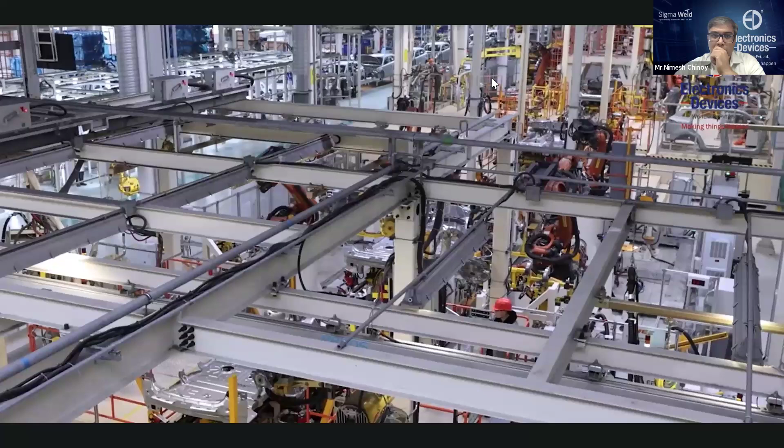Today, the Indian automobile industry is third largest in the world. But there was a time when conventional heating solutions and heavy reliance on imports created roadblocks for it. Our induction heating solutions paved the way for it to be in the fifth gear and keep pace with the ever increasing demand. From Bajaj Chetak to Royal Enfield Bullet, from Maruti to Mahindra and Mercedes.

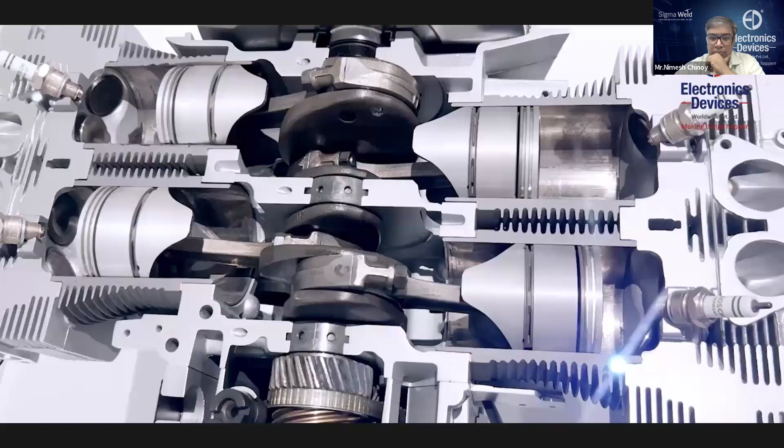Our indigenously built induction heating solutions have played an important role in empowering Indian and global automobile industry to cater to Indian and international markets.

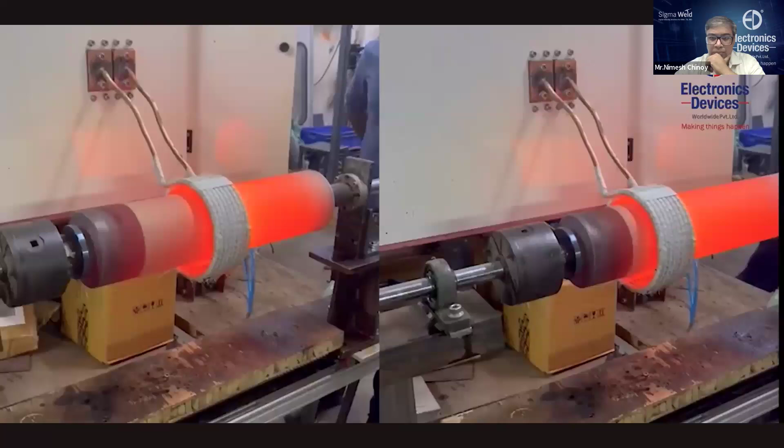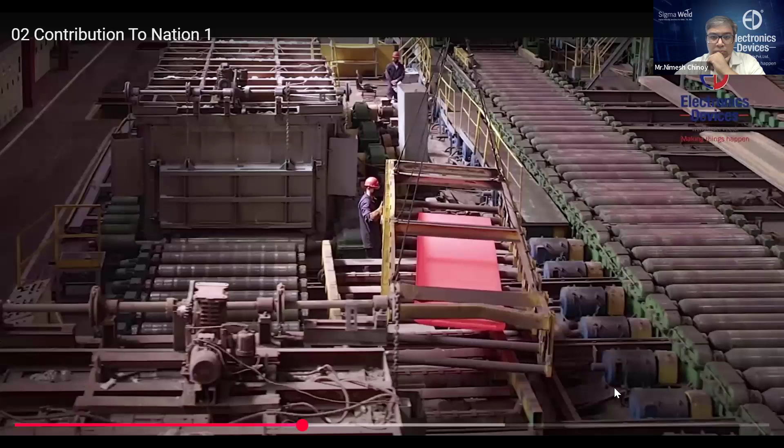There was a time when India did not have technology or forex capital. Many industries had to rely either on conventional production methods or had to pay heavy import duties, which was not feasible. And at the same time, consumerism was on the rise. Consumers demanded quality products. Spillage, tampering was no more accepted.

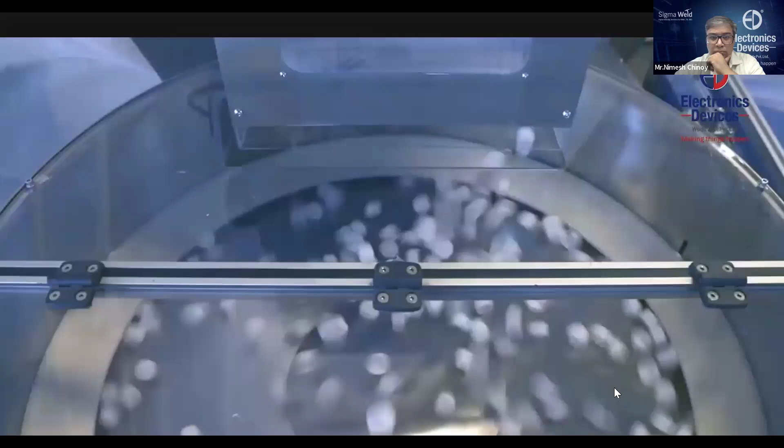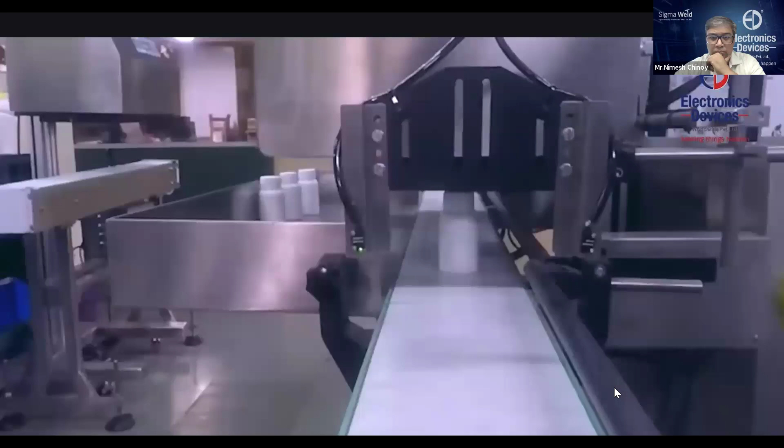Our first of its kind hermetically sealed solutions help deliver customer expectations. Plastic packaged bottles and containers could be sealed, leaving no room for leakage, counterfeiting, or product recalls. Today, FMCG, dairy, pharma, and food companies are serving fresh Indian spices, beverages, personal care, medical products to Indians and global citizens.

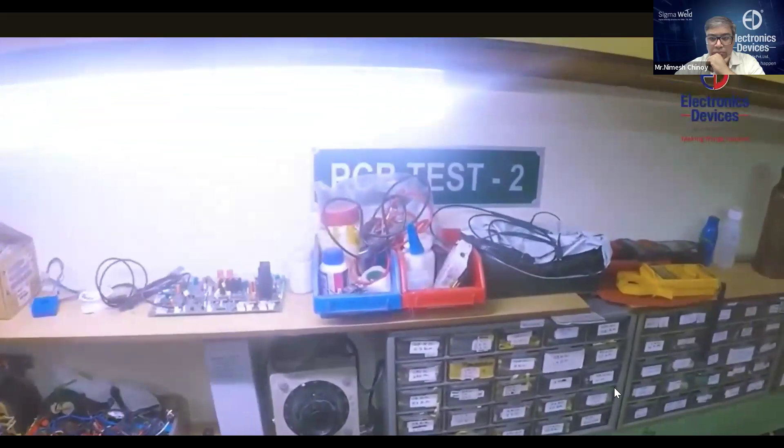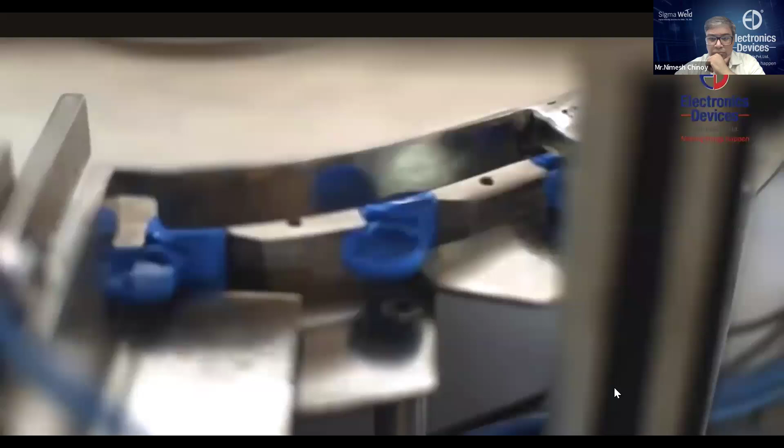The Indian pharmaceutical industry was facing a compliance challenge. Its medical science was ready for the US market, but it had to be US FDA compliant. Our made in India and first ever lab scaler machine helped Indian pharmaceutical companies with testing their products that made them US FDA compliant. From an import dependent country, we transitioned to an exporting nation even in the pharma segment.

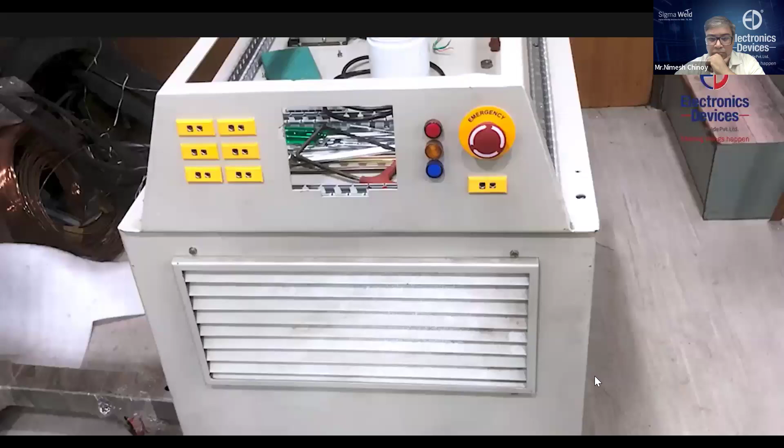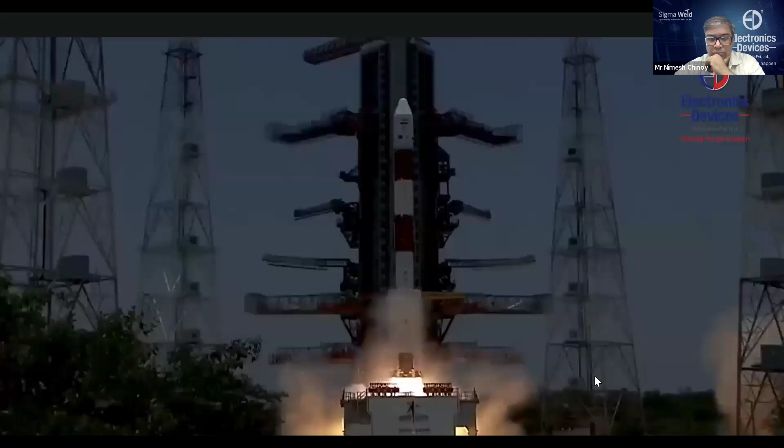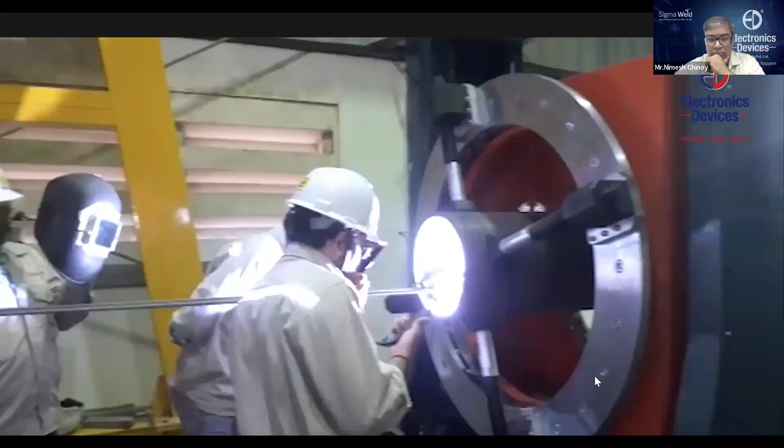Defense, aerospace, and nuclear are sensitive sectors crucial to strengthen India's global power. The country cannot be dependent on technology transfers and imports. The high-powered annealing machine built by us and used by Bharat Forge laid a solid ground for India's defense in the form of the Agni missile.

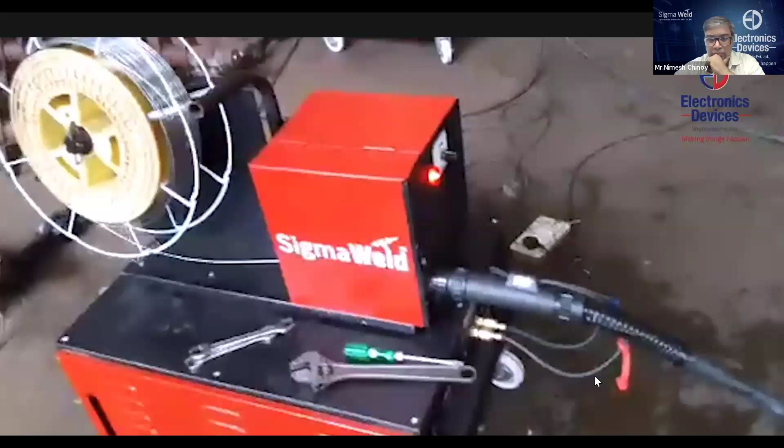Several of our indigenously built induction heating and welding solutions are used for battle tanks, submarines, foot over bridges, to manufacturing bullets and bombshells, in Mangalyaan and Chandrayaan.

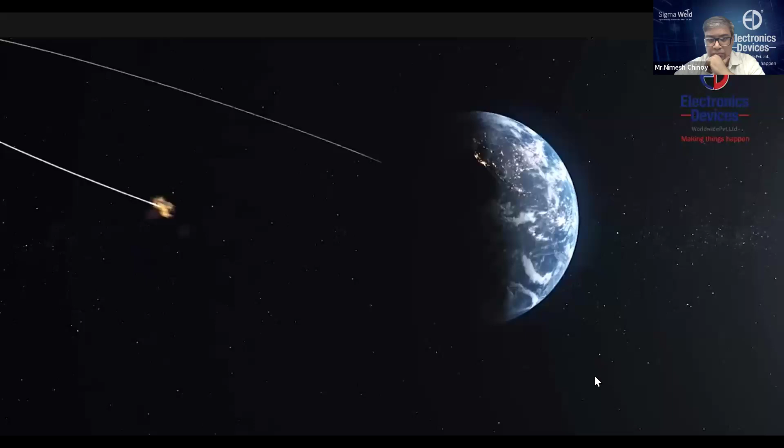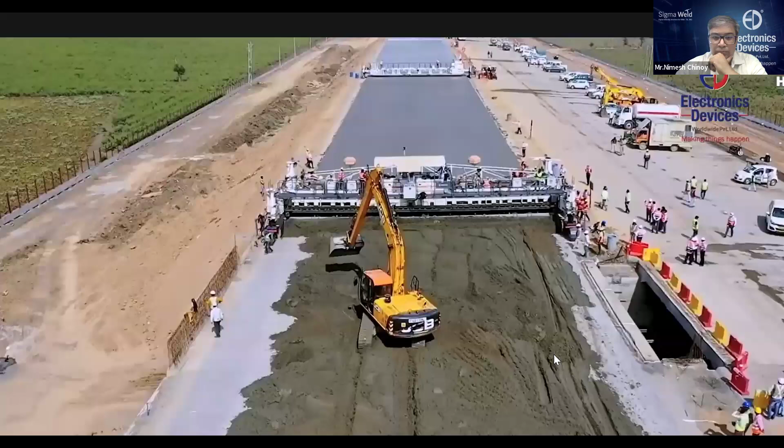Each and every made in India engineering solution has answered the call of industries. These solutions have saved billions in foreign exchange and energy consumption while enhancing productivity and reducing cycle times. These solutions have even inspired and encouraged 30,000 brands across 80 countries to choose us and to choose India for sourcing their engineering solutions.

That is what we are celebrating today. The ingenuity of India and Electronics Devices Worldwide Private Limited.

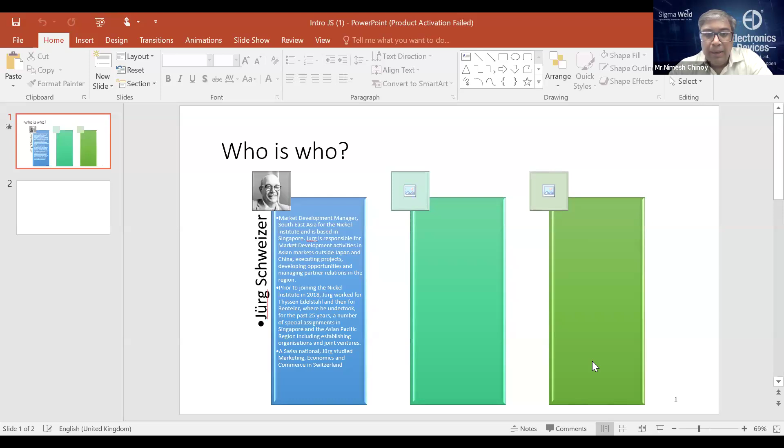Prior to joining the Nickel Institute in 2018, Jürg worked for Thyssen Edelstahl, and then for Benteler, where he undertook for the past 25 years a number of special assignments in Singapore and the Asia Pacific region, including establishing organizations and joint ventures. A Swiss national, Jürg studied marketing, economics, and commerce in Switzerland. And now I request him to take over so that he can introduce our guest.

Okido, I try to share my screen, send request. Okay. Yep, I have it. I need to get the right screen. Okay. Oh, you should be able to see it now.

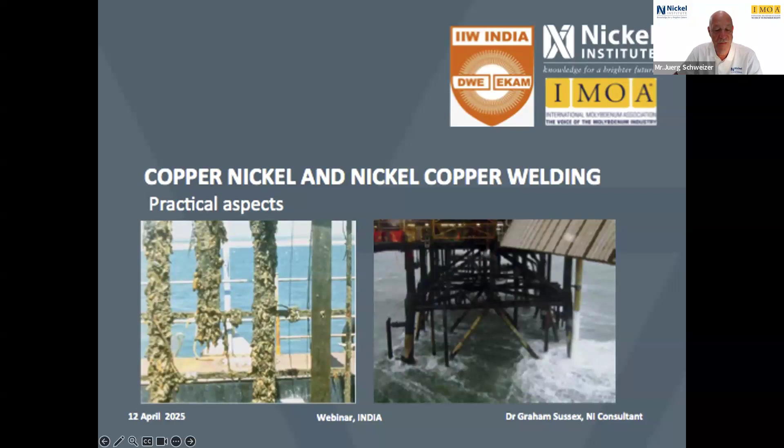And quickly, an introduction on the key sponsors of this. We have the Nickel Institute, and we are a global association of leading nickel producers. We promote the proper use of nickel in various applications, and we support markets for new and existing nickel uses, including stainless steel, while advocating for sound science, risk management, and socio-economic benefits in public policy. As you all know, nickel still plays a vital role in over 75% of stainless steel.

So our headquarters is located in Toronto. We have a research lab in Durham, the US, called NiPERA. Then we have our Brussels office. They are especially on public policies, sustainability, communication, and market development. And then two subsidiaries, one located in Brisbane and one in Singapore. So there are as well two non-profit organization offices in China and Japan.

Then the International Molybdenum Association, in short IMOA, is a global non-profit trade organization representing most of the molybdenum industry. They promote the properties and sustainable benefits of molybdenum as a key alloying element of stainless steels and nickel-based alloys, especially enhancing corrosion resistance in various modern applications.

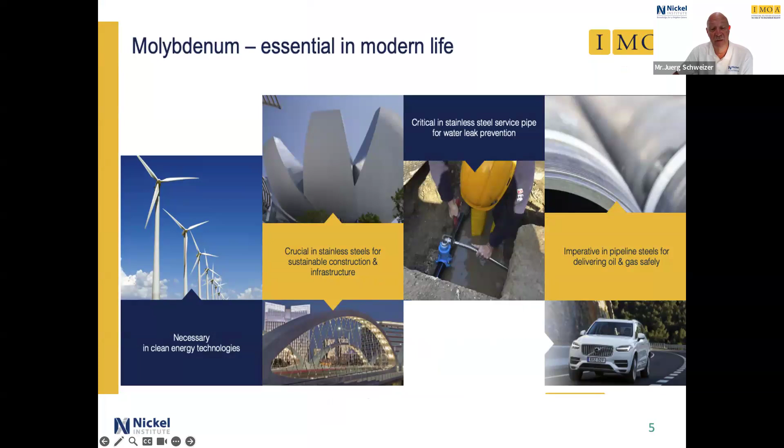And now the most important person of today, that is Dr. Graham Sussex. Graham is an expert in corrosion and material consulting with over 35 years of experience, serving as a consultant for the Nickel Institute for more than a decade. He brings extensive knowledge in stainless steel applications and standards. He has also been a technical specialist with the Australian Stainless Steel Development Association for over 20 years.

He is active in ASTM and Australian standards development, and has significant contribution to the advancements in AS/NZS. This is the Australian standard and the New Zealand standards in welding for stainless steel.

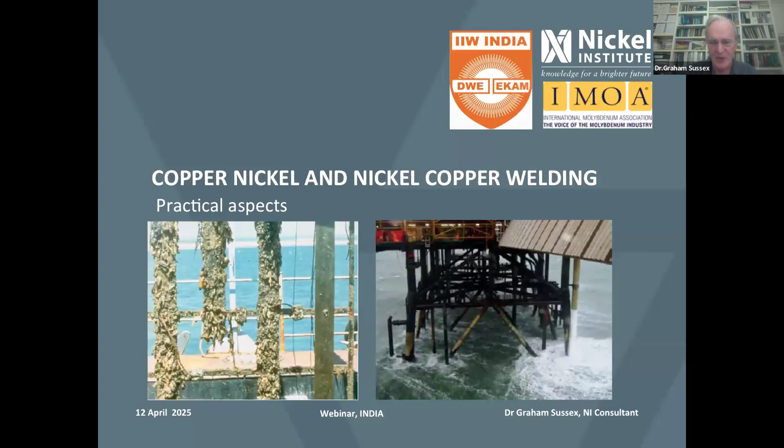On the right, it's an offshore platform, and they clad the supports with 90/10 copper nickel, 25 years in service and minimal fouling and minimal corrosion. And both of those images come from a Copper Development Association Nickel Institute publication.

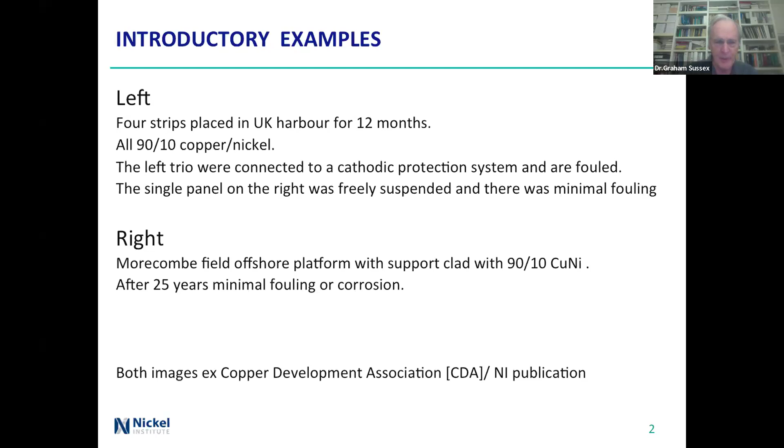Now, I'm going to talk about these things. The copper nickel alloys of interest are 90/10 and 70/30, and that's copper nickels, which include a bit of iron, a bit of manganese, maybe a bit of chromium, and some of the castings have niobium in them just for stabilization. The nickel copper grades are basically 400 series, the N04400 and the K500. And the difference between the two of them is that the K500 is a precipitation hardening material, often used for fasteners. I'll talk about that in a minute.

So the composition of them is they're both about 65 nickel, both about 30 or 31 copper, 2% iron, 2% manganese for the 400, whereas the K500 one has got aluminium and 0.6% titanium. So they form a gamma prime, which actually stiffens up the

What do I do about questions? Just wait until the end? Okay, fine, I'll just wait till the end.

Gamma prime in the K500 and make it very strong. I'll briefly mention, but not very much, the R405, which is a sulfur-containing free machining version of the 400 series, but really it's not used an awful lot. I'll talk a bit about corrosion resistance, mainly in marine environments, and then a little bit about welding techniques, including selection of consumables.

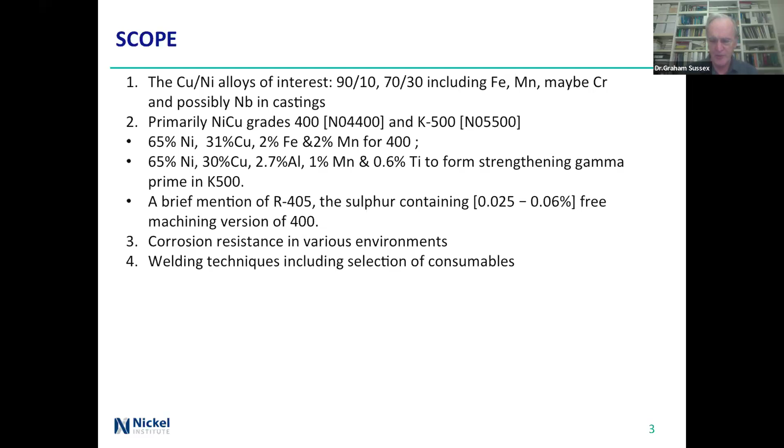So this is some tests done by various people, but it was in a harbour in the UK, and those pictures there were taken at year 1.

I think I need to move that up to the top somehow. No, I can't. Okay. At 1 year, 2 years, 5 years, I think. How do I move the logo at the bottom? The thing at the bottom. Let's see if I can get it up.

Yes, I can. Right. It's a 5-year sequence. So the carbon steel, the top was 3 months, 9 months, 18 months, and then the bottom it's 36 months, 48 months, and 60. And there was no protection. So basically they just got fouled up in a bad way.

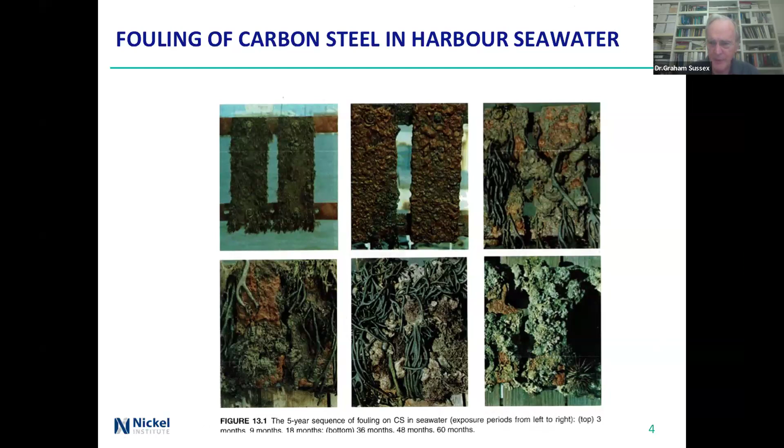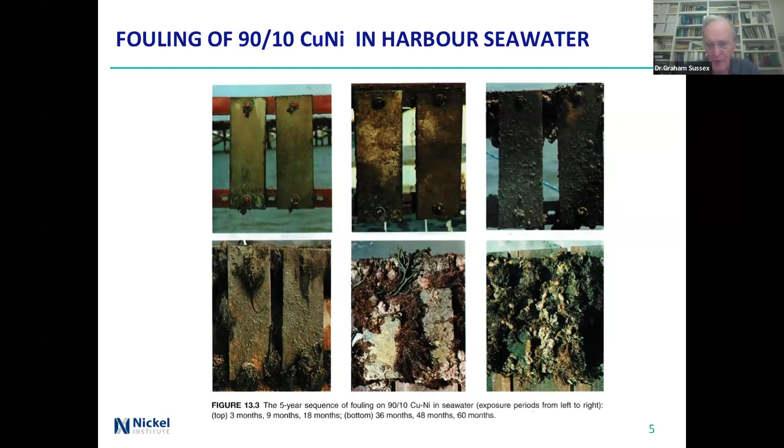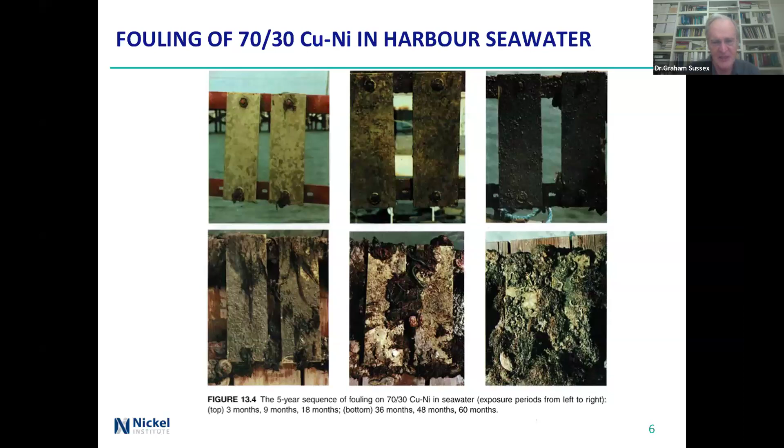Basically, because it's sitting in a harbour, there's nothing actually doing anything. And if you get any slime sitting on it, then basically the copper stops dissolving and protecting.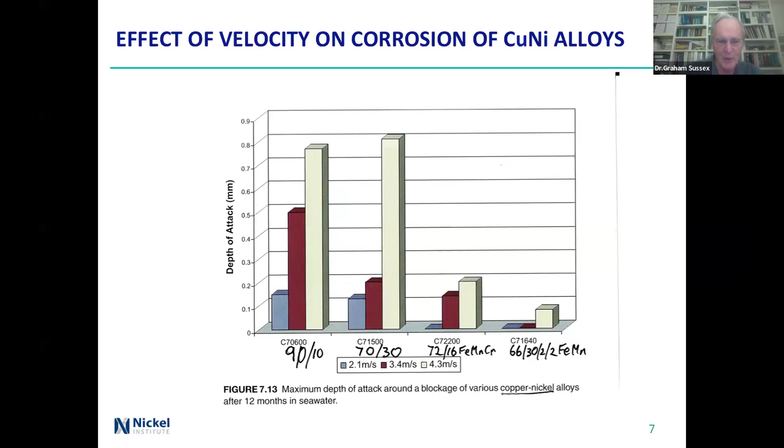Now that's getting pretty fast for a copper nickel. For a stainless steel, it's absolutely nothing. But the difference is in terms of what gets swept away in terms of the copper, so that it doesn't actually stop the depth of attack going on. And notice that the attack depths there are up to 1 millimeter, not very much.

This is a piece of 90-10 copper nickel pipe, which had perforated. Well, actually, it hadn't perforated. You can see on the left there the actual band where it's connected up, but it's certainly corroded.

Probably, basically, this is what the report said, the iron was not in solution. It actually came out in individual precipitates and rather mucked up the actual protective action. So that's what can go wrong if you manage to contaminate the copper nickel substrate with the wrong sort of metallurgy.

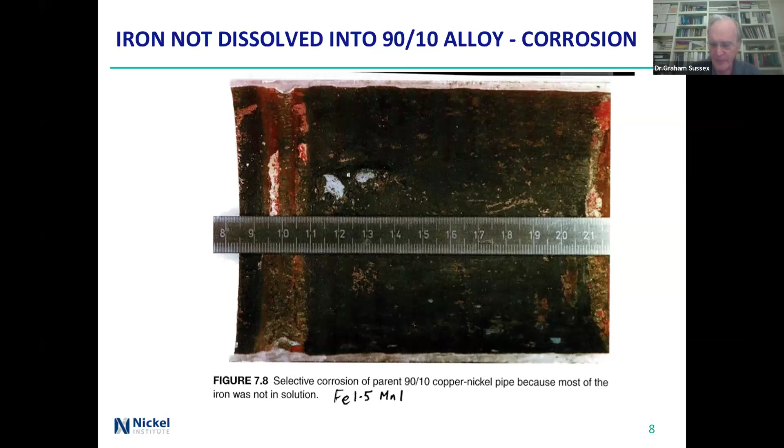This looks pretty, doesn't it? That is alloy 400. So it's a very high 65 nickel, 31 copper, so not quite so much copper, so you would expect a degree of fouling, except that that's a very, very resistant material in reducing environments, alloy 400. And I was going to show a picture of this, but I didn't.

Okay, so around the centre, we've got a clamp, and we've got quite a severe crevice there, and it's corroded to an extent, but it's an alloy that works in reducing environments. So it goes to 0.2, perhaps 0.5 of a millimetre, and then stops. All those spots around it are where corrosion has started, proceeded for a while, and then stopped.

So when you scrub that up, you'll find that you're looking at bare metal underneath. And that's quite a useful thing for an alloy. But remember, it only works in a reducing environment. So the initial corrosion, this is just corrosion, will continue, but not at a great rate. And that was, I scrubbed it out, it was actually for a year's exposure.

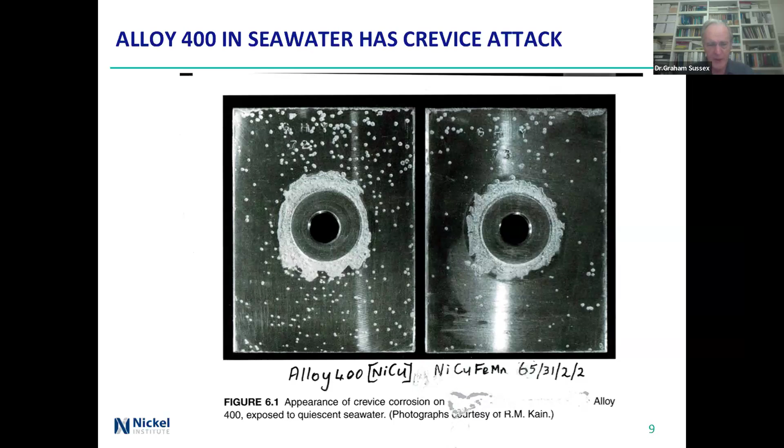This is looking at a 70-30. So there's less copper, more nickel, and O-rings were put around these, and you can see where they've been clamped at the end, and the protruding bit at the end has been attacked. But the black color is basically not corroding, it's just a copper oxide really.

But underneath the gasket, you've got a bit of corrosion going on because it's not quite as good in a reducing environment. I have another picture of it, but I didn't think it showed particularly extra. But after 3 years, this is 500 hours of seawater flow.

Dr. Graham, is it possible for you to get a little closer to the mic or bring the mic closer to you? The voice is a little low. Okay, is that any better? That's much better, yeah. Okay, all right. Well, don't look at the picture because I'm leaning right into the phone.

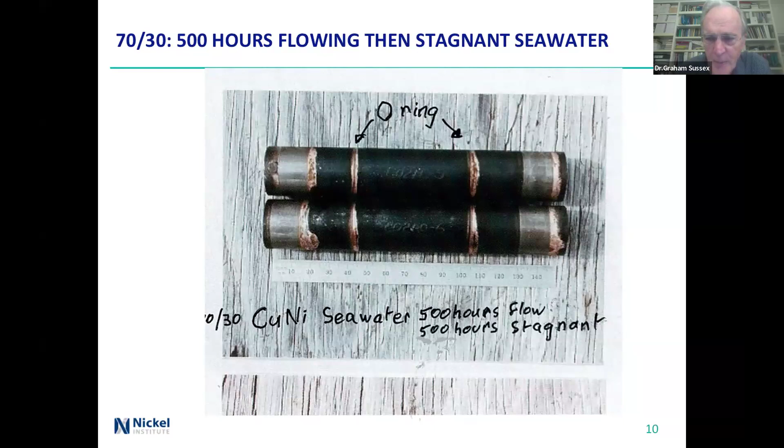Okay, this is a 70-30 copper nickel, and in the crevice up there, there is just corrosion going on because it's not completely inert. But the service, 500 hours flowing seawater, 500 hours stagnant. Stagnant is when it starts to go badly. The next picture, which I don't have, after 3 years, showed that there was corrosion going on all across the whole surface, which is not bad, but it was significantly the beginning of attack.

Okay, so let's talk about the fact that we're actually going to be doing welding on these alloys. And this is the sort of penetration that you get if you're used to doing mild steel. If you're using 12 chrome steels, stainlesses, then that's the sort of penetration you'd actually get. If you're looking at 304 or a super duplex, 7 or 8% nickel. And if you're looking at a Monel, that's a 400 or K500, then it's about 70% nickel, and that's about how far it would go through proportionately.

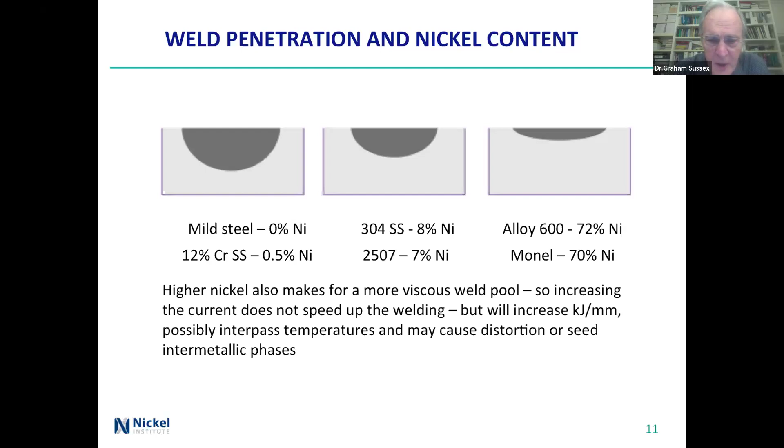So it's not that anything's gone wrong with the way the welding is going, it's just an inherent factor. And those of you who use high nickel alloys will absolutely recognize this. So the higher nickel basically makes the weld pool more viscous as well. So if you put the current up because you think it's just not quite hot enough, it won't do anything except heat the whole thing up, and it'll take longer to cool down, and you may get issues at high temperatures with forming phases that you don't want. The interpass temperatures would go up, and you might get distortion. And the intermetallic phases is something that I actually said as well.

So let's just look a bit at the welding. The copper and nickel are both completely soluble in each other. They're single phase, so you can't harden them by heat treatment because you can't precipitate something out and lock the microstructure up. You can cold work them reasonably easily, but there will be some strength loss in the narrow band adjacent to the fusion line when you weld it up. So you've got a concentration at a point where it's a bit softer.

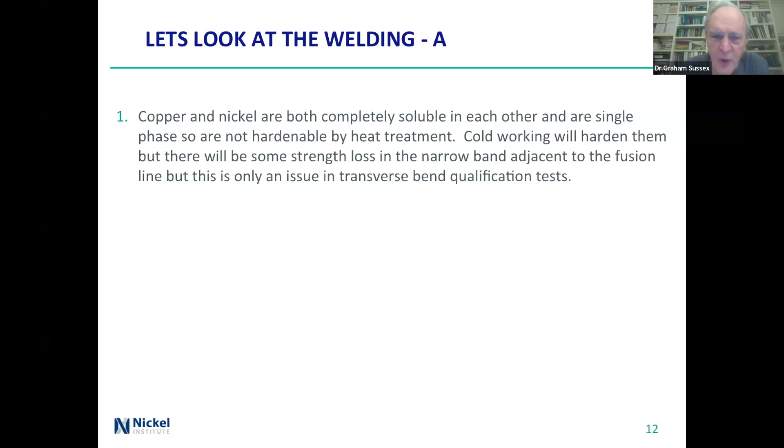But that's only really an issue on things like transverse bend qualification tests. If you're worried about that, then turn it around and do it as a longitudinal bend, but you may have to talk to your quality control people about that. The other components in there are a bit of manganese, about 1%-ish, as a deoxidizer or a desulfurizer. So they're basically taking out oxidizing agents, and some iron to give you erosion resistance. Or if you want more strength, you can replace some of the iron with chromium. I'll show you the actual numbers in a few minutes.

Because of the lowish level of deoxidizer, if you weld them autogenously, then you may have a problem. There might also be porosity issues at that point. While there are matching filler metals, typically 70-30 copper nickel is used; it's got a 0.2% proof stress of about 270 MPa, which is better than the 90-10 copper nickel, about 200. And it's going to be more noble compared to the parent metal. That's what you want. The small weld surface is at a higher potential, and therefore it's protected from any corrosion that might occur in the length of the pipe.

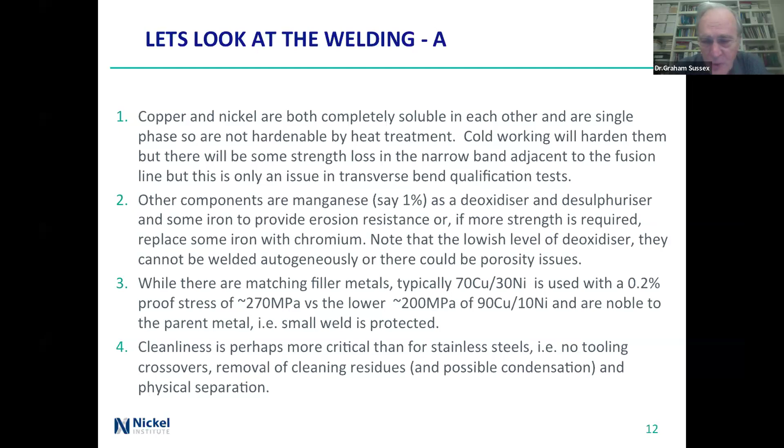And cleanliness is a lot more critical than for stainless steels. You can't allow for tooling crossovers from carbon steel or other materials; iron is a problem, but chromium can also be a problem. And you need to remove any cleaning residues, or any condensation. One of the examples I came across was people using air blasts to clean stuff up and getting some condensation because their nice air blast hadn't been properly dried. And physical separation is a good way of making sure that if you're grinding something up somewhere, you don't put muck and rubbish onto your nice clean weld prep.

The root pass has got to be free of contamination. Otherwise, you wind up with poor porosity there. And that's going to be encouraged by dilution from the parent metal, because you're putting in a designed filler and you really don't want to have more parent metal coming in than normal. So you say, okay, let's make it a slightly larger root gap so you don't actually get so much of the parent metal coming in, or increase the amount of filler metal that you're putting in. So that's really getting the actual root level having decent corrosion resistance, decent properties.

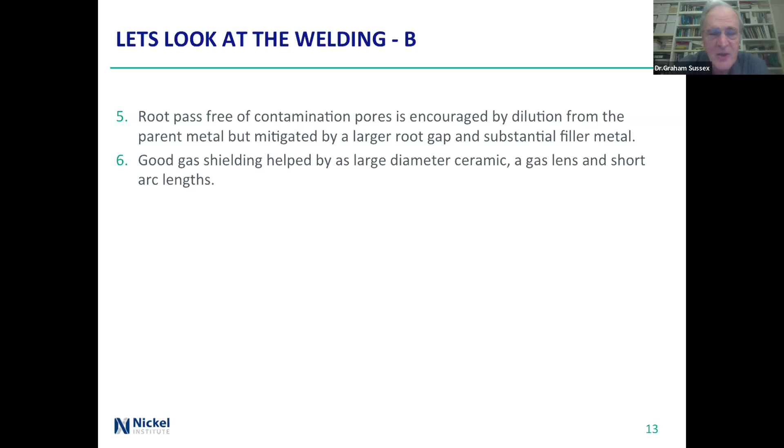Very good gas shielding helps, but you probably need a reasonably large diameter ceramic, maybe even a gas lens. And certainly you're looking at reasonably short arc lengths, because long arc lengths just encourage air intake. And that's bad news for making sure that you don't get contamination. Remember, we're talking copper nickel. We're not talking stainless steel. I mean, yes, with stainless steel it's an issue, but it's a little more sensitive with the copper nickels.

You need to be careful about low melting point contaminants such as lead. That's not usually a problem. Phosphorus. So you probably want to have a look at the phosphorus and sulfur contribution that might come from the consumables that you're using. And carbon. Now that's usually just because of dirt and rubbish, but they all are potential contributors to hot fissuring. And really, you want to look at an interpass temperature of no more than 150 or so, because you don't want the thing to stay hot for too long.

The copper nickels have a high thermal expansion coefficient, so when you're tacking them up, you need more than you need with stainless steel and more than you need with carbon steel. But because they are fully austenitic, it's not so much different from the ordinary austenitic stainless steels. And shield gas, argon, possibly some hydrogen to give you a higher heat input, but that'd only really be for the root, and the next few runs are probably best with pure argon. You won't get quite the amount of heat, but still.

And TIG welding gives the best quality. You'd normally use DC minus and pulsed current to get nice quality. Hey, I'm talking to welders, you know all this stuff.

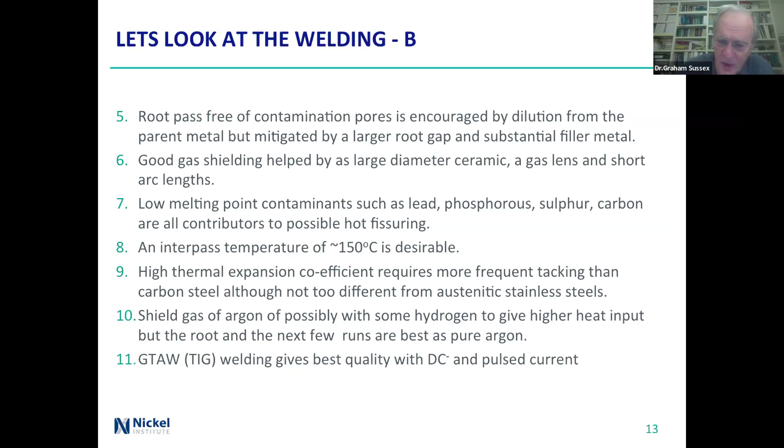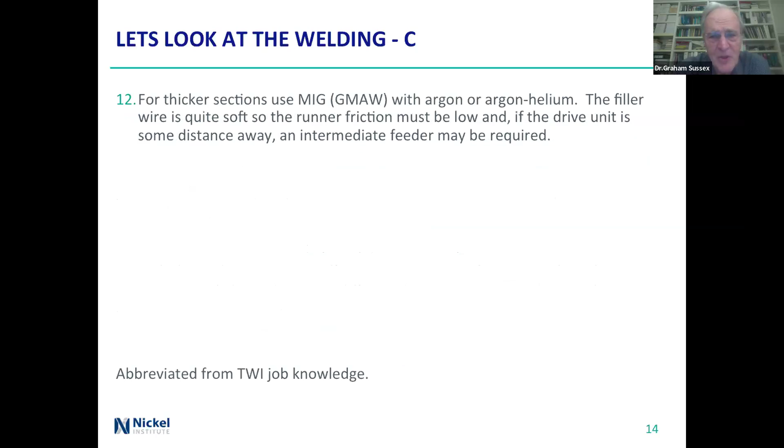And for thicker sections, you might use MIG with argon or argon helium. And the filler wire is quite soft, so your liner friction's got to be low. And if the drive unit's a bit away, then you may need an intermediate feeder. But that's all adding places where you could pick up rubbish, so you want to be careful that you're not getting contamination.

If you're doing MMA electrodes, generally basic flux, DC positive, and they've got to be dry, either in their packet or kept in an oven. If they get damp, dry them at up to 250 or so. It depends a bit on the particular material. And when you're doing the welding, keep the weaving down. I mean, 3 or 4 electrode diameters is about the maximum you should ever want.

And if you're looking at something that's more than about 12 millimeter, 12.5 millimeter, then submerged arc, yep, economical, provided you can make sure that the welding is horizontal, because otherwise things tend to flow around a bit. Weld prep, pretty similar to the MIG, and adjust the weld current down for the lower wire diameter than the MIG, and choose the flux to make sure that it can be readily detached. My spelling is terrible.

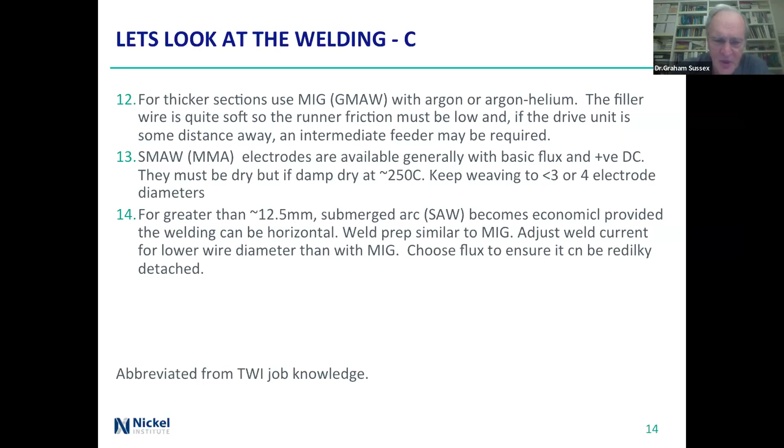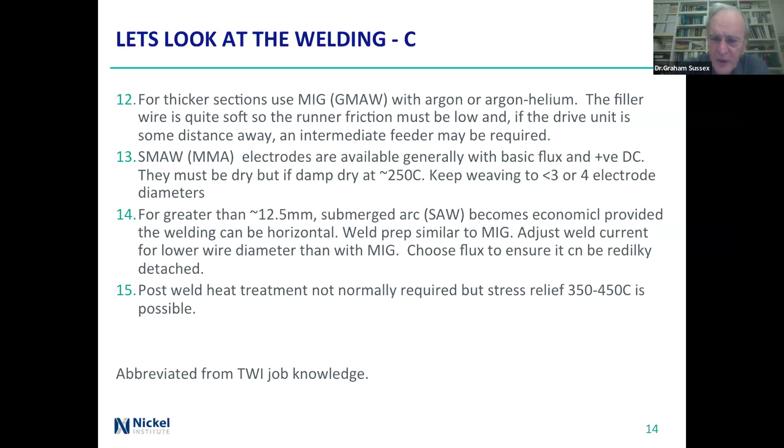And post-weld heat treatment, you usually don't need it. But if you do, you can do a stress relief, sort of 350 to 450. You can, but you don't normally need it.

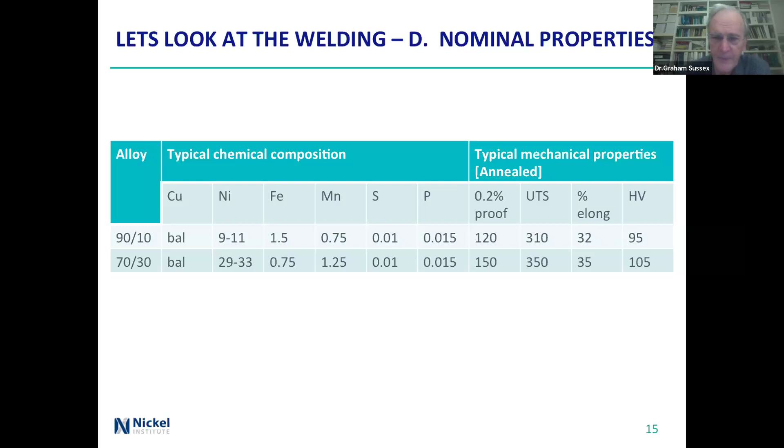This is the reason why copper-nickel alloys are fairly easy. A copper-nickel is a solid solution. They're basically completely soluble in each other. So there's no problem with bad phases coming out of that. It's all in the other things that are in there.

So you go from a liquid, you've got a bit of a band there, and then copper-nickel solid solution, totally soluble both ways. And of course, the reason why they tail off at the ends is just because it drops down a bit when you get to almost pure copper, almost pure nickel.

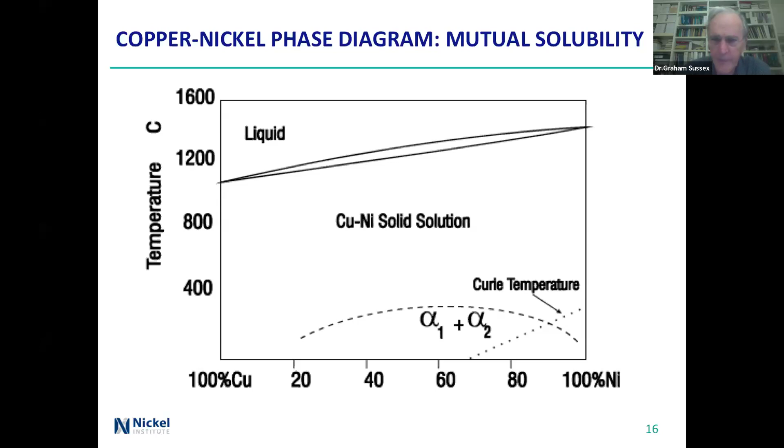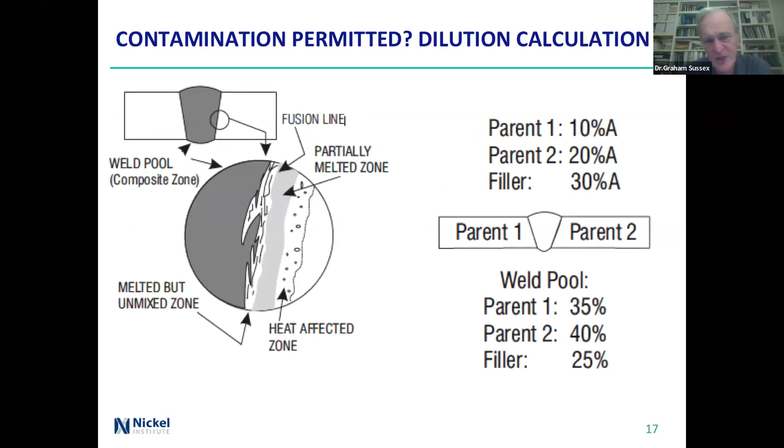So what do you want to do? This is putting two dissimilar metals together, and they're not compatible. We'll look in a second at the numbers that show that. But this is for carbon or low alloy steel, but it could equally well be anything that is sufficiently different to the second material. Put the buttering layer on, machine it into shape.

The second metal set, which is in the buttered layer, is that. The reason why it works is because you're not having a large amount of heat in, so you're not getting a lot of the carbon or low alloy steel in this case into the actual weld zone. And it's basically the same as doing a weld overlay. You'll get some mixing,

but not completely. Then you put the second gap, and then you go to welding and fill it all up as per normal. And so the weld metal that's going to be contaminated is the one that is right next door and underneath the second and third and fourth and fifth passes. So I love the buttering word, basically like putting butter on bread.

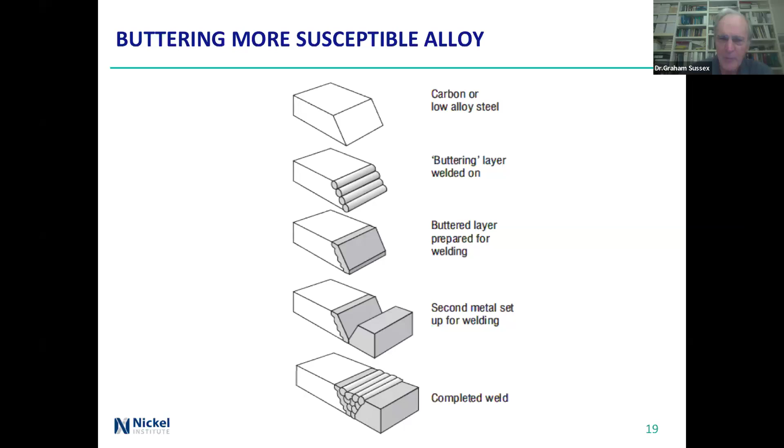This is from AWS. It's in multiple volumes, and it's looking at weld metal and what you can have in terms of chromium. So if you're talking about nickel, then you can put 30% in. If you're talking nickel copper, then you're talking about 8%. If you're talking about copper nickel, then you're only talking about 5%. And nickel chromium alloys, and there are obviously some around, then you're looking at about 15%. And this is just in terms of forming phases that are going to be detrimental to the actual microstructure.

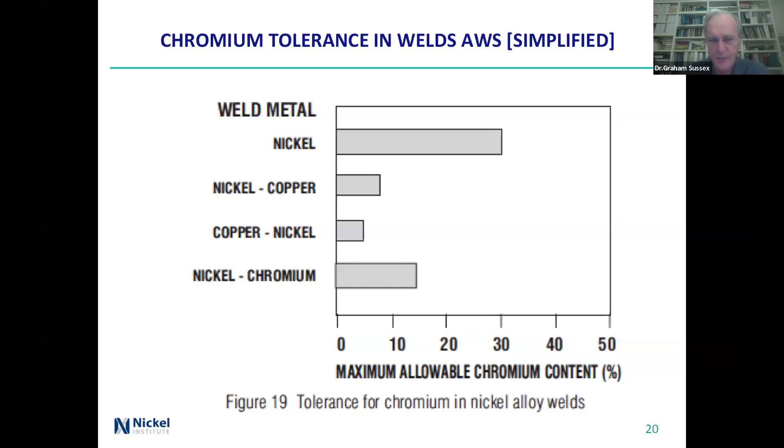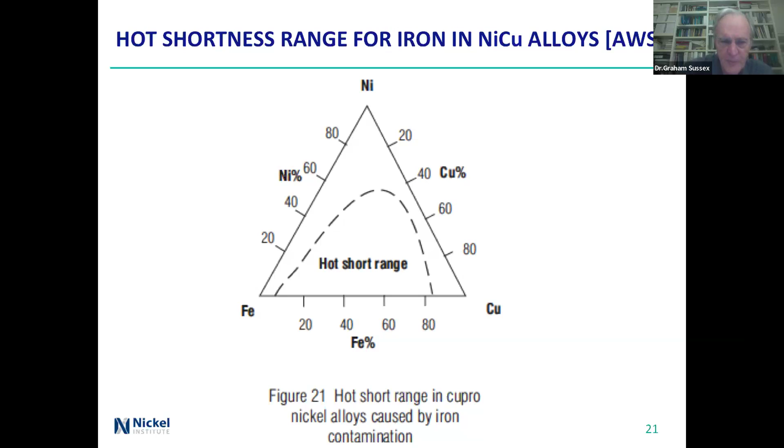This is the hot shortness range for worrying about iron in the nickel copper alloys. And again, it's a simplification of an American Weld. Actually, if you look at it in the AWS books, it's pretty colors, but still we won't go there. So in that hot short range, you have got basically iron-rich intergranular deposits, and basically that makes the thing crack. Actually, it's not so much intergranular, it just goes straight through. So if you've got lots of nickel or lots of copper, then you can stand things reasonably. Or if you have high nickel and chromium and copper below about 40%, then you'll be okay as well. But further down, the iron is just a problem.

This is iron tolerance in welds by weld process. It's basically the other one, but now broken down in more detail, saying that it's going to matter how I'm actually going to weld this and what process I'm going to use. That can be an issue, and you can decide, on this basis, I've got to make sure that I use either TIG or MIG, or I can get away with submerged arc. It will depend on what you've got and what you want to get.

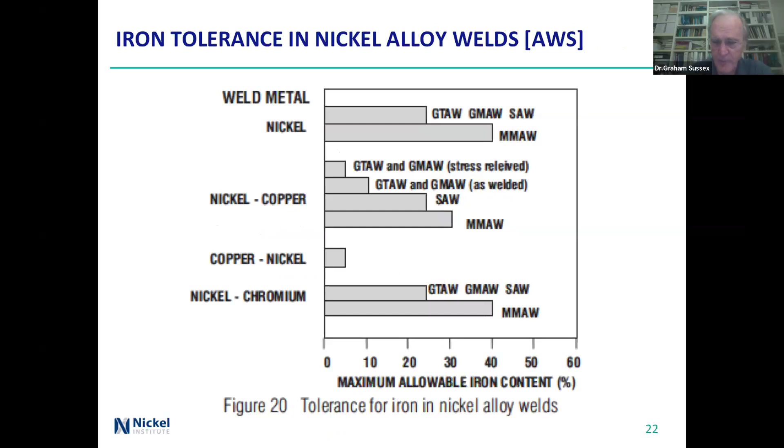And again, this is for iron content. The previous one was for chromium content. And up here, we've got chromium content. So they're also potentially a problem. So, summarizing those bits, it means that you need to check the consumable composition versus the substrate. If you're putting copper nickel onto carbon steel, you'll need a buffer layer of AWS A5.14, so ERNiCu-7, on the steel before you put down the next layer of the Monel. And Monel is just the high alloy, the copper nickel. Or else the iron contamination will give you hot cracking.

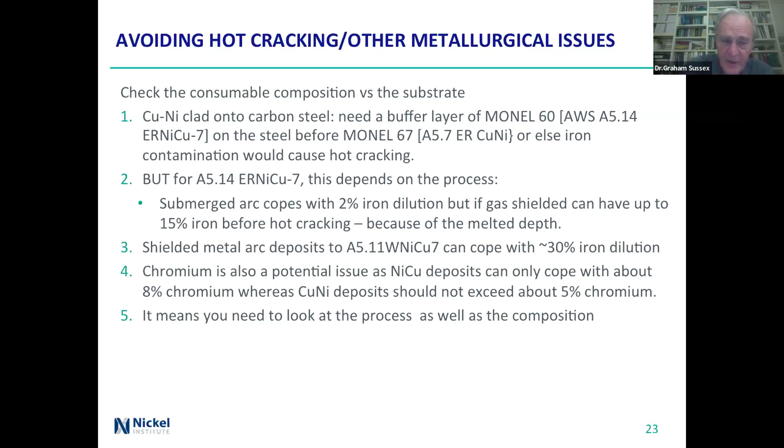But if you're talking about the A5.14 nickel copper 7, it's going to depend on the process. With sub-arc, 2% iron dilution, but if it's gas shielded, it can have up to 15% before you get hot cracking. My understanding is it's because of the melt depth and how far down you're pulling up the metal to be contaminated. Shielded metal arc deposits can cope with about 30% iron dilution. That's pretty dramatic. And chromium: nickel copper deposits only cope with about 8%, whereas copper nickel deposits shouldn't exceed 5%. It really means you need to look at the process as well as the composition.

And I'm very sorry, but that's about it. It's a very quick once over, and that's the reason I provided this detailed set of references here. Copper nickel welding, that's freely available. The copper nickel fabrication 12014 and the guidelines both come from the Nickel Institute publications. European Federation of Corrosion, perhaps a bit old, 2012, but it was Carol Powell, who's unfortunately since died, and Roger Francis, who's a guru on stainless steels, but also high nickels as well. And the dissimilar metal welding material from Noel Herbst, who used to be the Nickel Institute technical person, can be downloaded from that link. The Stainless Steel Association in Australia has it on their website.

And I'm sorry, that's not nearly as much detail as I was intending to put in, but I ran out of time because of a few personal issues. So that's it. I think it's quite crisp and very much to the point.

We have quite a few questions already. Okay. What do we do? Go to the Q&A at the bottom, if you see. Q&A. Okay, right. Down. Next to the share button, there's a Q&A. Okay. Next to the share, there's a Q&A button. Yeah, okay. All right.